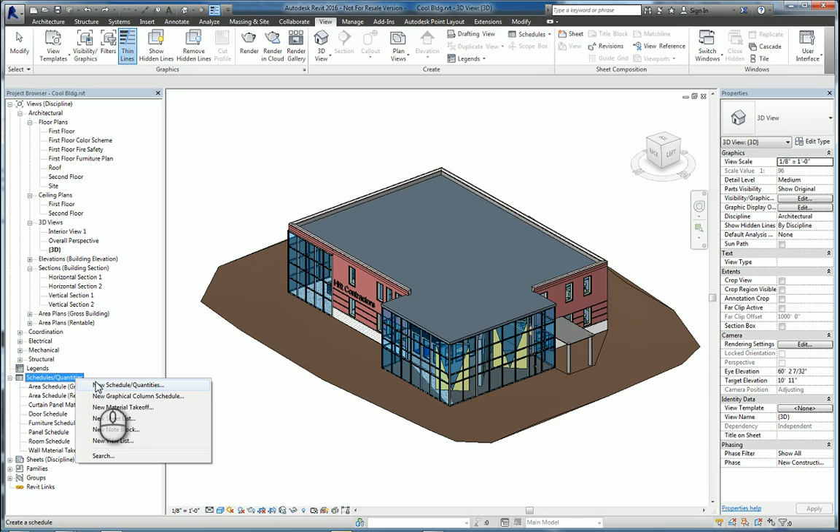In today's screencast, we'll be taking a look at schedules in Revit. Here I am in Revit 2016, and I have just a standard model up. A schedule is considered a view in Revit, so we'll go to the View tab of the ribbon. In the Create panel, there is the command for schedule. You also have the ability in the project browser to right-click where it says Schedules and Quantities and add a new schedule. When you do this, the new schedule window comes up and it will ask you, what object are you trying to schedule? What category of objects?

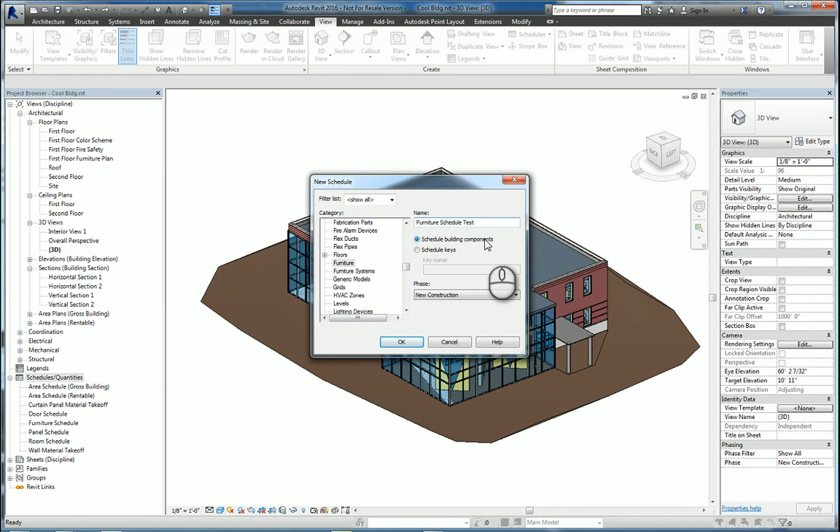So for example, let's say we do furniture schedule, and you can give it a name. And you are scheduling the actual building components, the families themselves. We'll hit OK, and your schedule properties window will open up. And the way this window functions is there are tabs: fields, filter, sorting, grouping, so on and so forth. The fields tab is basically all the vertical columns of your schedule from left to right.

On the left-hand side are all the fields that are available for you to work with. You can go ahead and either single click and hit add, or you can double click. So for example, I can double click mark, family and type, what level it's on, manufacturer, model, what else? Maybe type mark, and count and cost, and maybe even description.

Once you have the vertical columns you want on the right-hand side, you can actually sort this by moving them up or down. And let's see, we'll go ahead and manufacturer, and we'll put description, we'll put cost and count at the bottom. You can always rearrange this after the fact, so don't worry if you didn't get this exactly the way you wanted to.

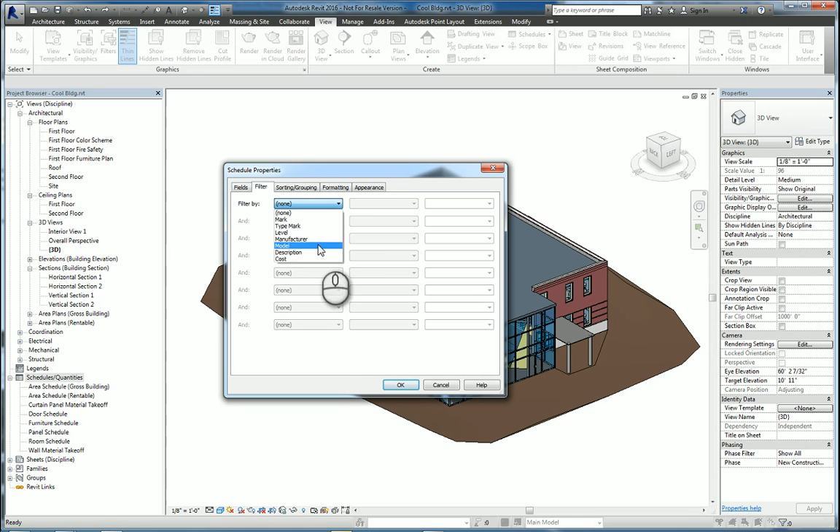The filters tab basically says, now that I'm looking at that data, what do you want me to just show? In other words, maybe I need to filter by a particular level, and if it's equal to a certain level, that means only the furniture that's on the first floor will show up in this schedule. For now, I won't do that.

Sorting and grouping is basically how you want to sort the data. Maybe we want to sort by mark, maybe by type mark, and then maybe by level. We can set up totaling if we want to as well. We can also put headers and footers if we need to. And we can have our own custom title block for the total.

The formatting tab basically says all the information that's in those cells, how do you want them to be arranged? For example, they can all be center justified. The cost can be totaled out using currency to the second decimal place and the dollar symbol. The count can also be totaled out as well. What else? And so, you can go through and you can make any adjustments that you need to.

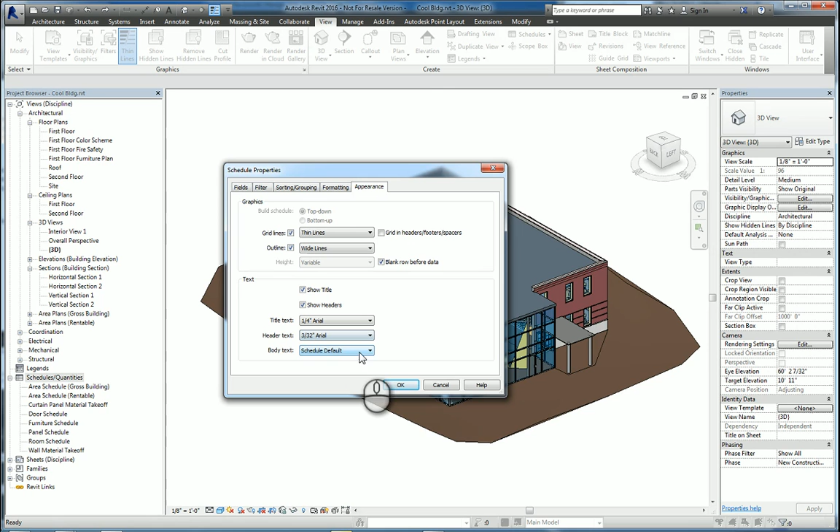The Appearance tab says, how do the graphic lines of the schedule view appear on the actual CD sheet? And how does the text appear? So for example, maybe we want wide lines for the graphics on the outline. Maybe we want 1/4 inch Arial. Maybe we want 3/32 inch Arial, and then the schedule is the default. When you're finished, hit OK. It builds the schedule for you and shows you the data.

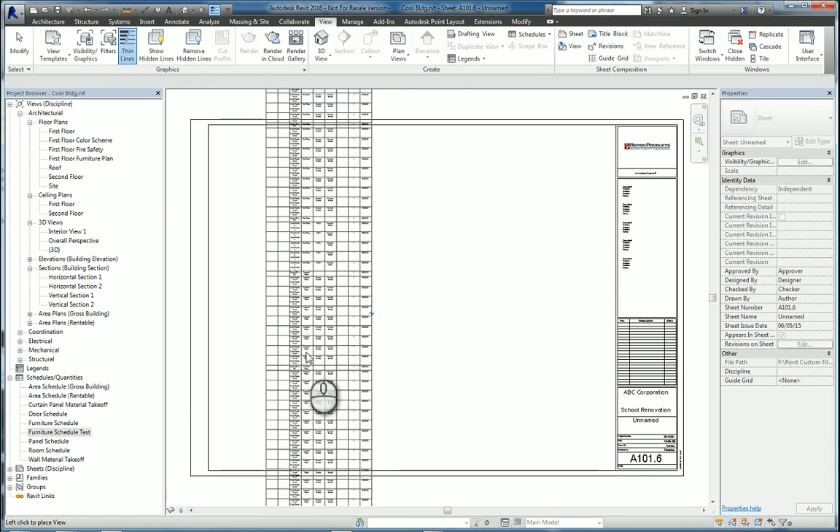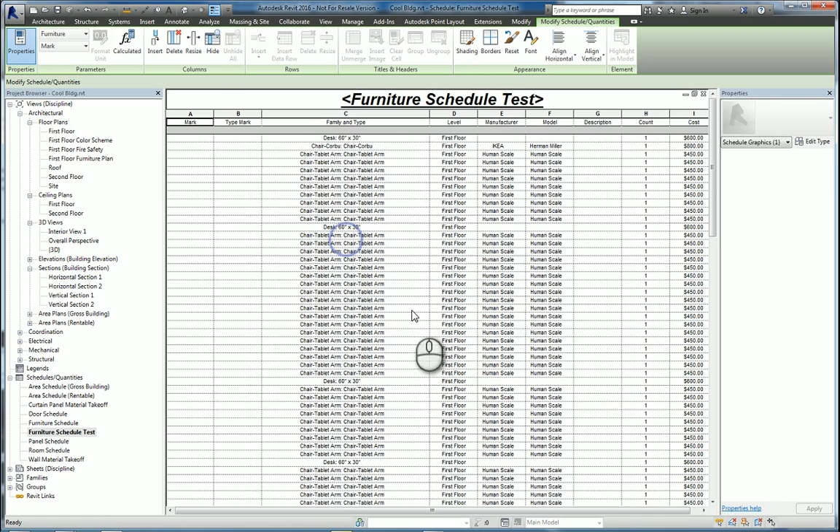This is the actual view, and that view is then put on a new sheet or on an existing sheet. So we'll just drag and drop it and place it accordingly. Now, as you can see, this is very, very long. So depending on what kind of information you need to display and how you need to display it, you may need to make adjustments such as the widths of the columns, whether we want to itemize them or not itemize them. If you want to, you can double click and go straight back to the actual schedule view.

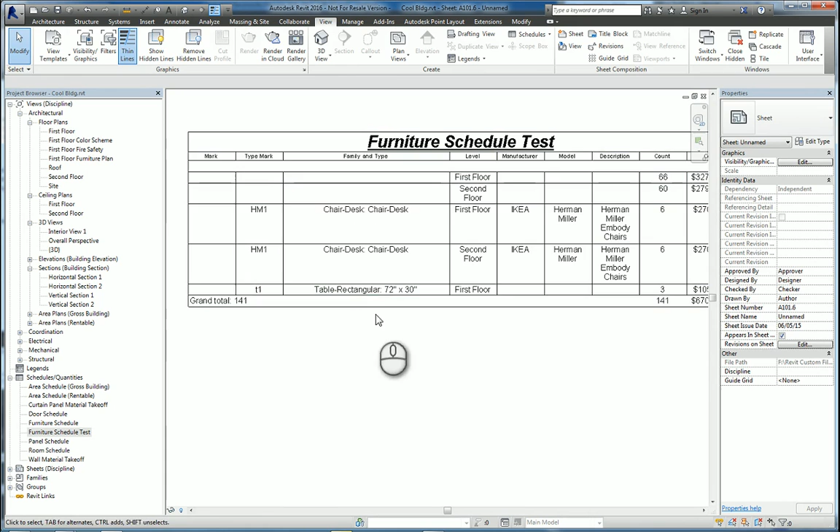We'll go to, say, sorting, and we won't itemize. So now everything's grouped and it's a much, much smaller schedule. I go back to the view and close it and go back to the sheet. I can see that it's now updated and it's not so long. Again, we can select it and we can adjust the width of each of the columns and make it look appropriate.

And as you can see, there's a lot of information already placed into the instance and property data of the schedule and of the objects themselves. Let's go back to that view. Here, if I go in and I put information such as 1 for the mark, if I get a warning like this, it's letting me know that I'm actually putting in information that is duplicating. So be very careful, especially when you're not itemizing every instance.

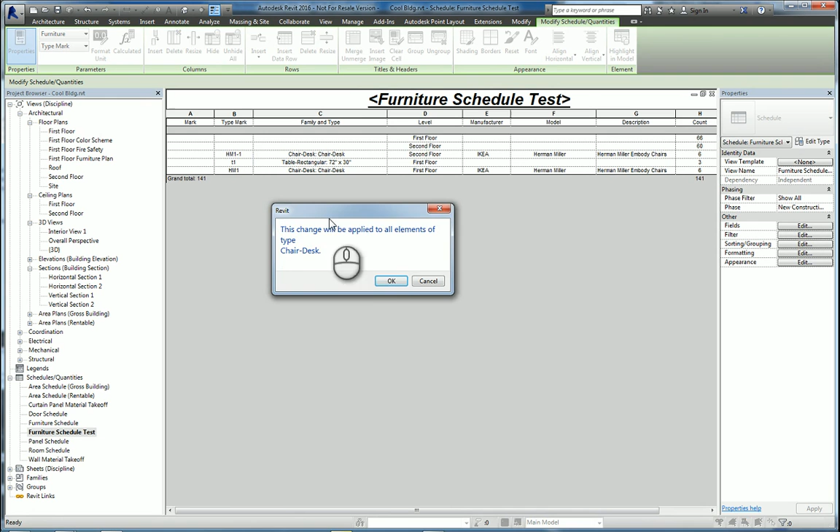If I go here to the type mark and I change this to HM1-1 like this, what ends up happening is you're going to get a warning to let you know you're changing information that's type property information. So all the objects of that type will change. Hit OK, and it will update accordingly.

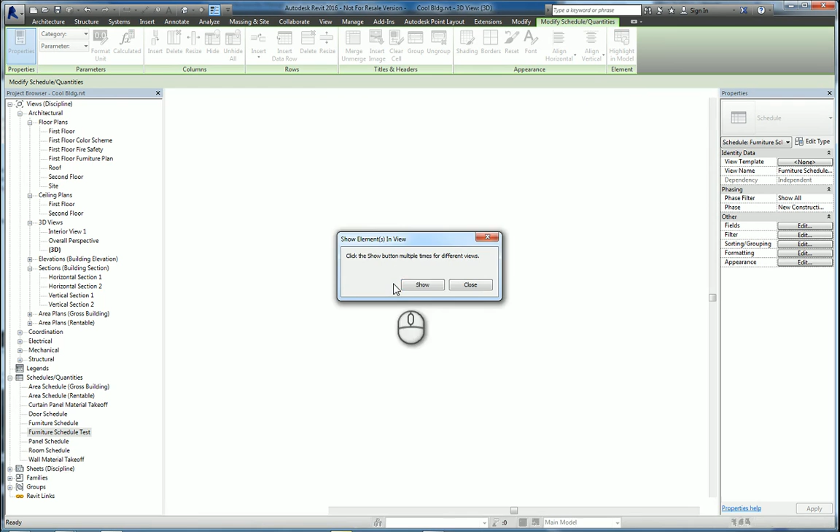At any point in time, you can select any one of those and click highlight in the model, and it will take you to a view to see that model. You can always continue to click show, and it will cycle through to find the best view that you want to see. Okay, and then we'll close those views and get back to the schedule.

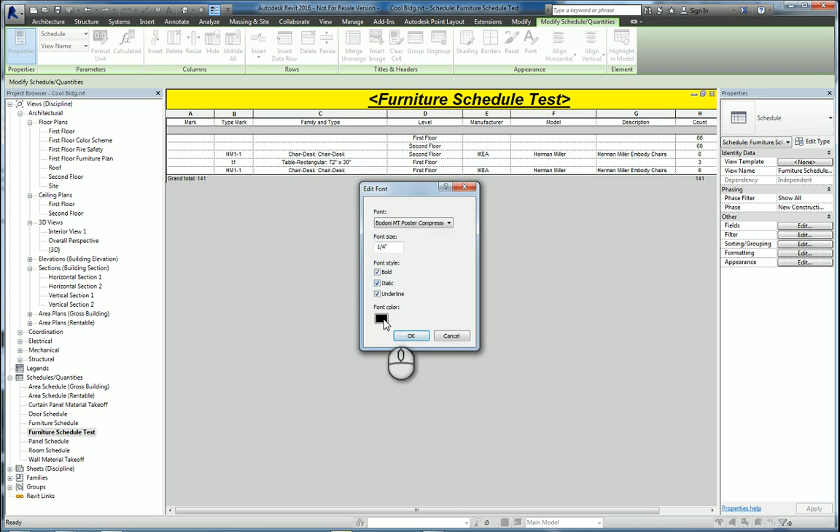Obviously, we can go through and we can insert, delete, resize, hide columns and rows if we need to. And depending on what cell we're in, we could do things like shading and borders. So maybe I want to shade it up. Maybe I want the font to be a different font and maybe a different color. So there's a lot of capability in the schedule within Revit. It's not quite as extensive as Excel, but it's getting there.

And that's it. And then obviously there's other things you can do: align horizontal, vertical, borders, things like that. So this is a quick tutorial on schedules in Revit.